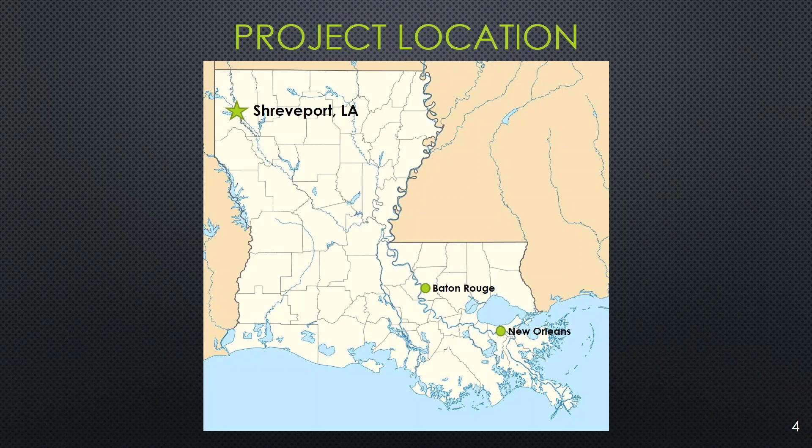Speaking of Interstate 49, this project is part of a greater overall effort to connect Lafayette, Louisiana to Kansas City, Missouri, where it will tie into the southern terminus of Interstate 29, which in turn runs all the way north to Canada. DOTD has referred to the portion of I-49, shown as the star on the map, as I-49 North. That corridor runs from Shreveport to the Arkansas state line and was subdivided into 11 design and construction projects. Altogether, the 11 projects built over 36 miles of new interstate and cost approximately $570 million. The project we are discussing today was the southernmost and was the final component of I-49 North, Segment K.

Incidentally, there's also an ongoing effort by DOTD to upgrade the existing US 90 to interstate standards. When completed, this would extend I-49 south from Lafayette to New Orleans.

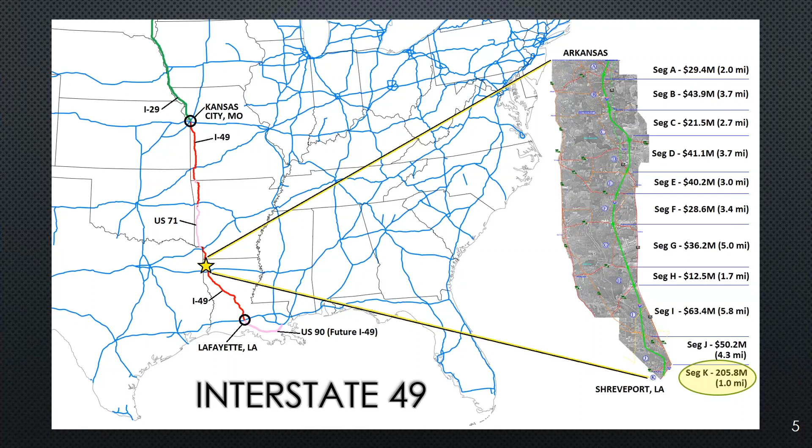This is an aerial and layout of what was proposed Segment K. North is to the right. I-220 runs from the top left to the bottom right of the screen, and I-49 begins with an I-220 interchange in the middle of the picture and then runs north. You'll note the interesting geometry for the interchange.

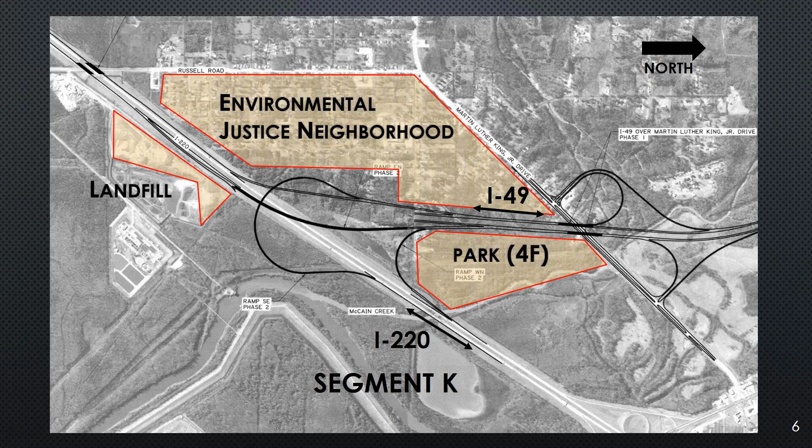This project had a number of challenging site constraints, including an active landfill to the south, an environmental justice neighborhood to the west, and a 4F property to the east.

Due to time and funding demands, the project was split into 2 phases during final plan development. The interchange with Martin Luther King Jr. Drive was separated out and let in phase 1, and the interchange itself, along with some I-220 improvements, was let in phase 2, which is the project we'll be discussing today.

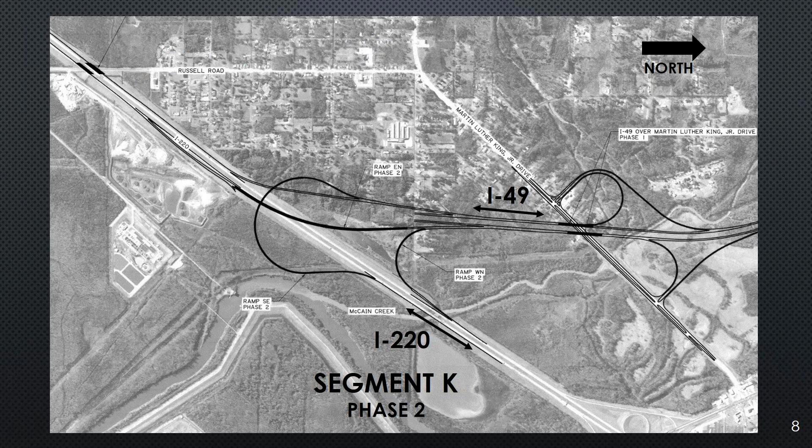Phase 2 consisted of widening of 2 existing parallel steel plate girder bridges over Russell Road, which we won't be covering, and constructing 3 flyover ramps serving as direct connectors between I-220 and I-49, which are the subject of today's webinar.

Ramp EN, or east to north, which is a 2-lane ramp over 3,000 feet in length, has a width that varies from 64 to 40 feet, which was due to a gore area at the beginning of the structure, and has a radius of 3,500 feet.

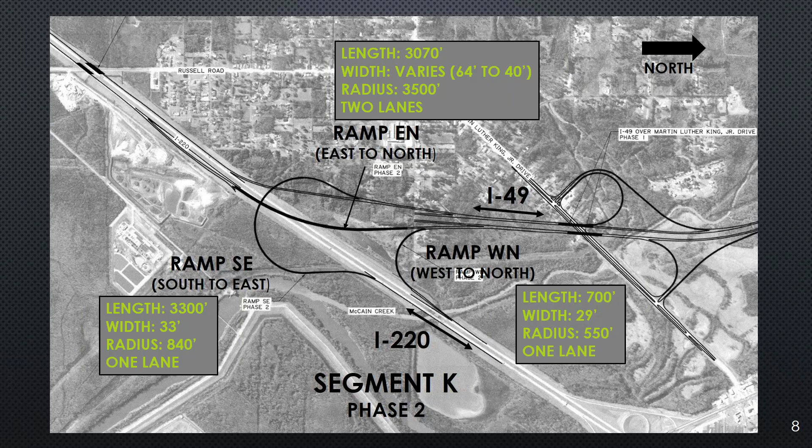Ramp SE, or south to east, which is a 1-lane ramp that is 3,300 feet long and has a width of 33 feet and a radius of 840 feet. And ramp WN, or west to north, which is a 1-lane ramp that is 700 feet long, has a width of 29 feet and a radius of 550 feet.

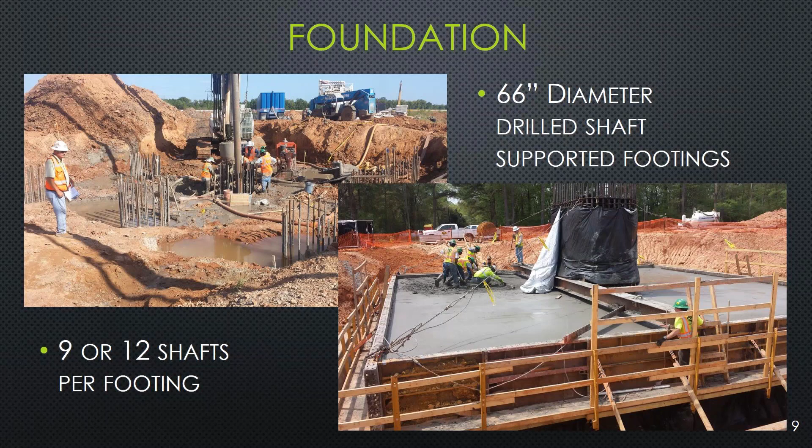All 3 ramps are founded on drilled shaft supported footings. Typically, footings at intermediate bents had either 9 or 12 66-inch diameter drilled shafts that were, on average, approximately 60 feet in length.

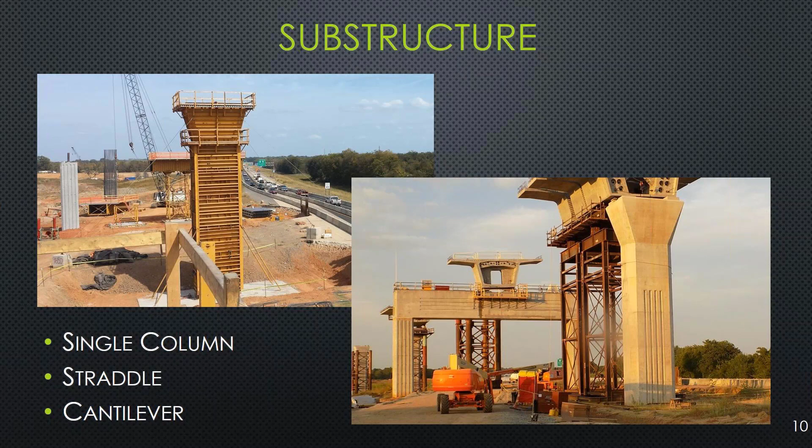The majority of the substructure consisted of single column bents with flared caps, but due to the severity of the skew crossing of ramp EN over I-220, 2 straddle bents and 1 cantilever bent became necessary. The straddle bents were post-tensioned, but the cantilever bent was conventionally reinforced.

We were required to maintain 1 lane of traffic in each direction for the duration of the project. The original suggested sequence of construction proposed closing the median lane on each side of the interstate to facilitate the median construction work, and closing the outside lane on each side to facilitate the outside work near the shoulders.

However, during construction, the DOTD project construction team, in conjunction with the contractor, devised the scheme shown, which was to cross over traffic and completely close one side of the interstate at a time. This change greatly simplified the construction and increased safety by moving the traveling public farther from the construction work.

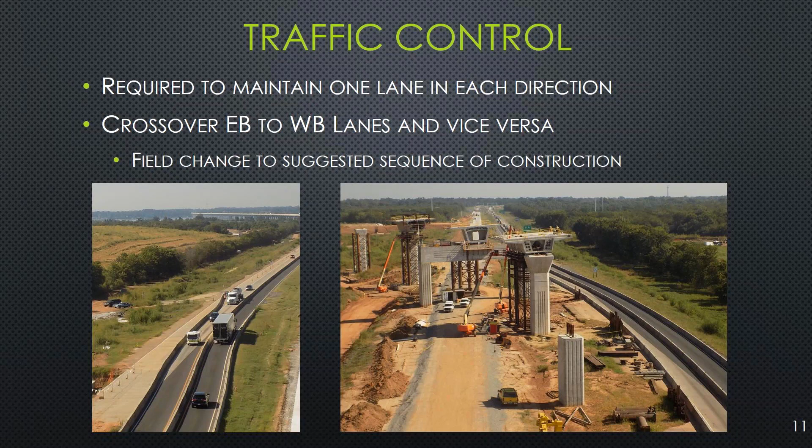You'll note in the picture on the right that the temporary support tower for the superstructure near the straddle bent is positioned in the middle of what would have been westbound I-220.

This was a design bid build project. The DOTD administration at the time decided to include bid alternatives, but because precast segmental concrete was a new technology to the state, the belief was that providing a more conventional design alternative in the form of steel trapezoidal box girders would provide a baseline alternative, mitigate our risk, increase the number of bidders for the project, and ultimately ensure that we achieve the best possible value for the project.

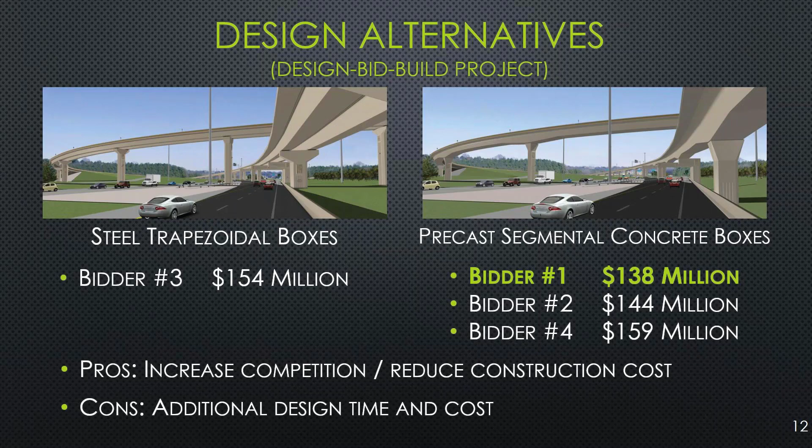There was obviously additional cost associated with the alternative, but unfortunately for our design consultant, given the funding constraints, there wasn't much additional time provided. However, ultimately our designers met the required letting schedule and we received 4 bids on the project.

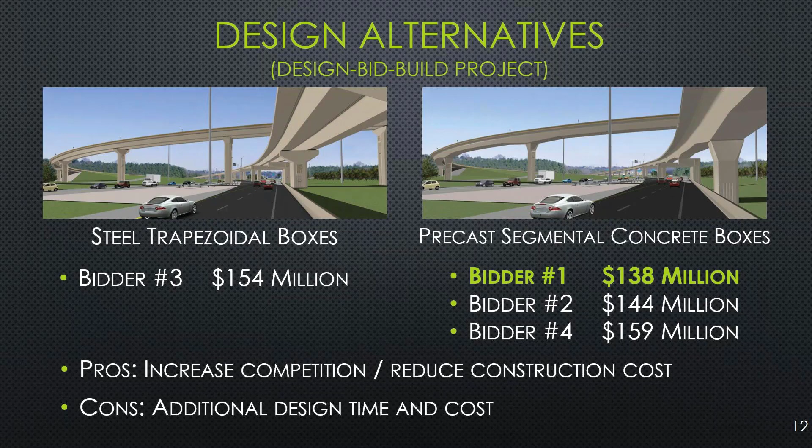3 bids, including the low bid, were received for the precast segmental alternative, and 1 bid was received on the steel trapezoidal box alternative.

And I actually just found out this past Monday that this project also won the 2019 ASBI Award of Excellence, which will be presented at the 2019 ASBI Convention this November in Orlando, Florida.

Like with any project, this project was challenging during design development and construction, but it's nice to see not only the final product functioning as was intended, but also for everyone to be recognized formally for all of their collective efforts. So with that being said, at this time, I'd like to turn the presentation over to Craig to discuss the more technical aspects of the project.

Thank you, Paul. Here's the agenda of what the major topics that I'm going to discuss with you today, and in some detail on it.

Before I begin the presentation, I'd really like to stress a key point and something I think is very important to understand with these style of bridges. The segmental bridges are a construction technique that has design implications, and as we walk through these slides, I think it'll be apparent why I believe strongly in this.

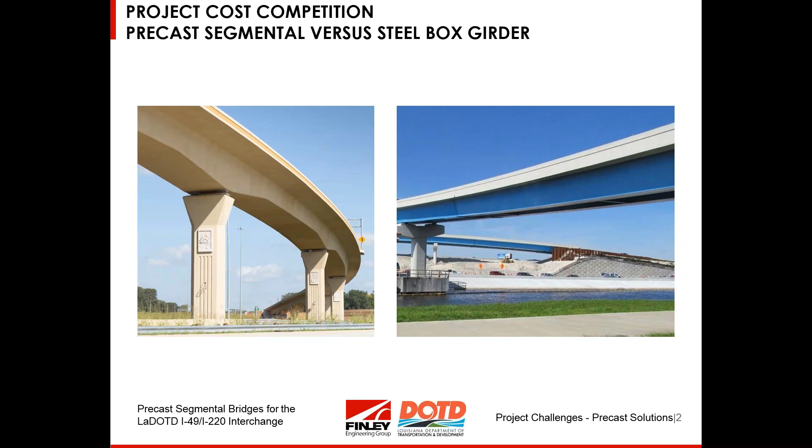As Paul shared with you, probably the biggest challenge on this project at the beginning is the desire by LaDOTD to introduce precast segmental bridge construction into their project type. So with that said, this job from day one was a cost competitive option presented for the contractors, and that drove a lot of our thinking and a lot of the challenges to really develop a fine-tuned project that had the design incorporating details that we knew was important for a successful project. And again, like most projects that have an ABC component to them, price is always a decider.

The LaDOTD had worked a lot with local stakeholders, and there was a demand for some project aesthetics. But again, in a cost competitive environment, these needed to be low cost or no cost.

Some of the things that were developed and added to the project were the column cap details, which serve a multitude of purposes we'll talk about later in both construction and future maintenance. But it also does a good job of visually transitioning between a constant cross-section column into a variable depth superstructure.

The local stakeholders wanted something unique about this project that addressed their social and cultural significance in the area, and there was a precast medallion developed in conjunction with that, which spotlights some of the influences. The consistent visual of the haunch segments of varying span lengths was very important, and when you look at this picture, it's obvious to see that the linear haunch on the first five segments was a critical design aspect on the project.

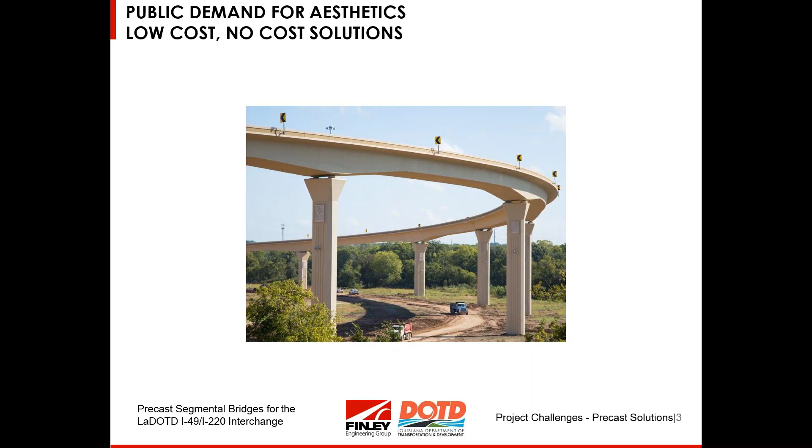Columns were constant shape, but we incorporated rustications and bevels into them to give a little more interesting look. In the end, I think the job has very good aesthetics, and they're basically things that are no cost, but were incorporated in to meet the project challenges at the beginning.

With this project, one of the biggest challenges, Paul shared some of the details, but probably the biggest challenge is this project has 730 segments on it. But with that, in those 730 segments, we had to adapt to span lengths of 140 to 260 feet.

The depths of segments ranged from 9 to 13 feet. We had a lot of variation in the height of the columns. But probably one of the two biggest challenges on this project were how to handle the varying roadway widths, which are very significant, you can see there, but also the various curvatures.

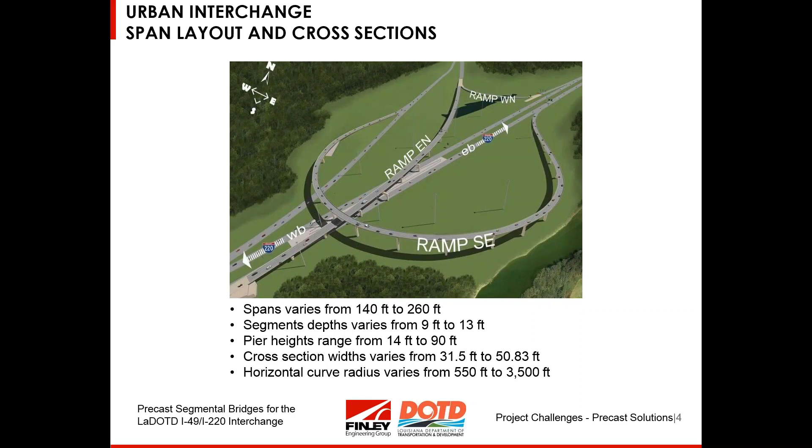These challenges are perfectly suited for ABC construction principles, and really drive the means and methods on this project that made it successful.

The big challenge is, how do we cast 730 segments with the minimum number of casting machines? A casting machine typically costs approximately $500,000, and they're good for 500 to 600 segments before refurbishing.

With the large number of segments and a lot of variation, both in depth and width and cross fall in the segments, we had to come up with a shape in the design process that allowed consistency and could be adaptable with constant forms and different insert panels.

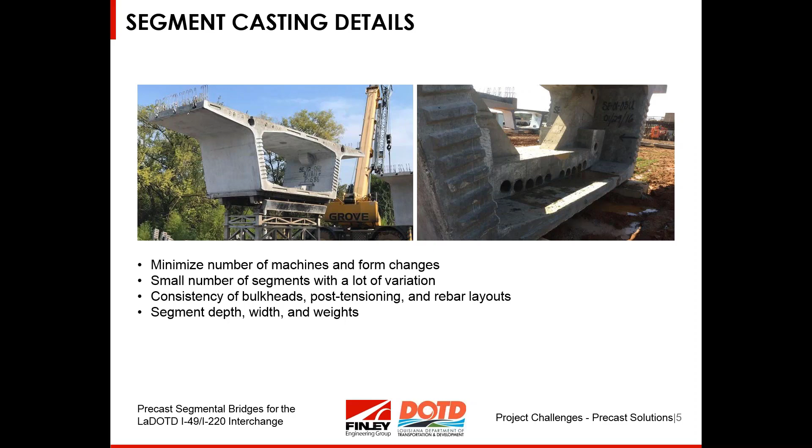You can see on the left a typical segment there in the casting machines that have the stack to adjust for the vertical dimensions of the segment. And on the right, it's again a typical segment, but form panels were introduced into the core forms for a deviation segment. A critical element always in a project is segment geometry, and these casting machines, one machine could accommodate all the variances.

In a project, it's always a major cost component of where you're going to cast the segments. It was no different than I-49, I-220. There was some adjacent property within the right-of-way that was available, very close to the interchange where the casting yard was set up. Other locations had been investigated, but this provides the most efficient use of labor and management.

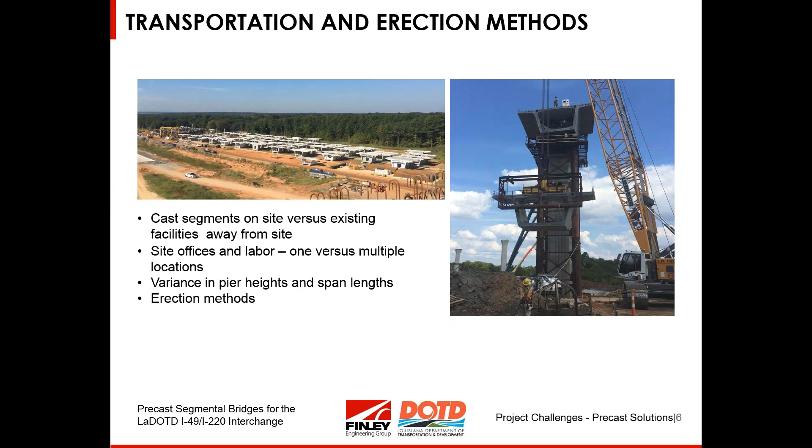Also reduces transportation costs. The variance in the pier heights and span lengths had to be accommodated in a uniform fashion and with a consistent set of equipment and forms to make it feasible. Overall, the erection methods drove our thinking in the preparation of the design. Faster and more for less were key components of making this a successful project.

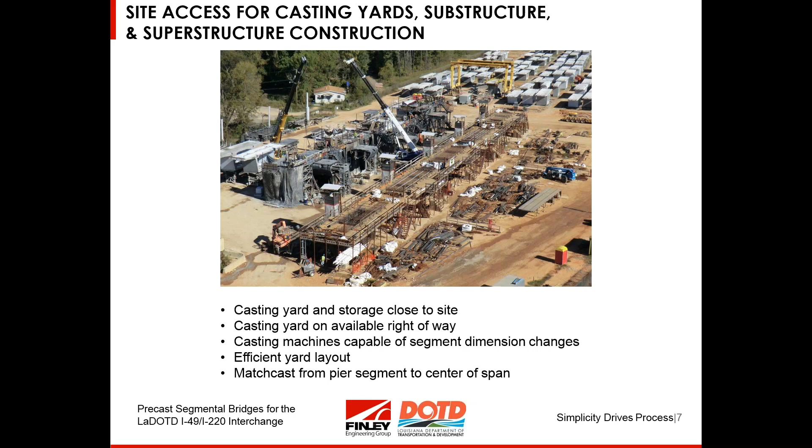The casting yard was about a half a mile from the site, and the storage was adjacent to the casting yard. This was a very efficient layout and very typical of what you would see in a precast match cast operation. Casting started at the pier segments and went out to the cantilevers, as you would expect for balanced cantilever construction.

On the columns, we've talked a little about the aesthetics, but what we wanted to do is simplify the forming. We had cross-section details with a consistent column shape, even though within the column the reinforcing patterns varied, but the shape and caps were the same. The variable pier heights were accommodated by the contractor's forming system and the number of pours per column. Everything was mildly reinforced, providing a simple and conventional construction process.

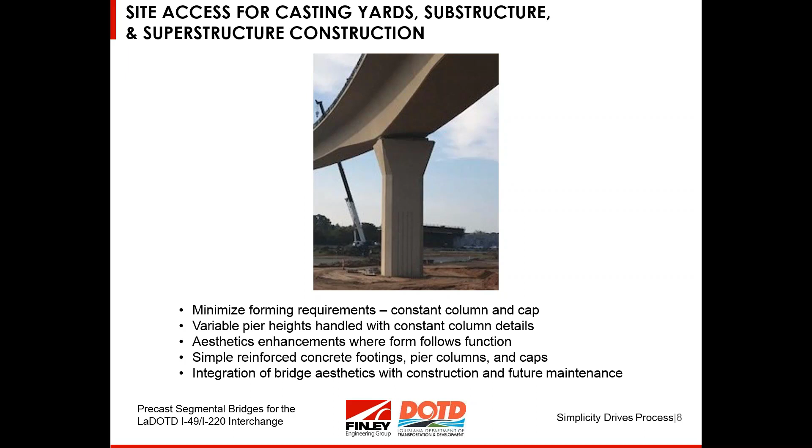For the use of these details, competitive first pricing was a premier consideration, but also future maintenance—how bearings could be replaced, drainage—and the aesthetics had to be low cost, no cost.

In the substructure, we used 66-inch drilled shafts with some fairly high loads. This gave compact footings, but the real advantage was that the project was designed to allow the temporary shoring towers, used to stabilize the cantilevers during construction, to rest over the drilled shafts and within the footings. This minimized the amount of secondary or additional foundations and simplified, streamlined construction.

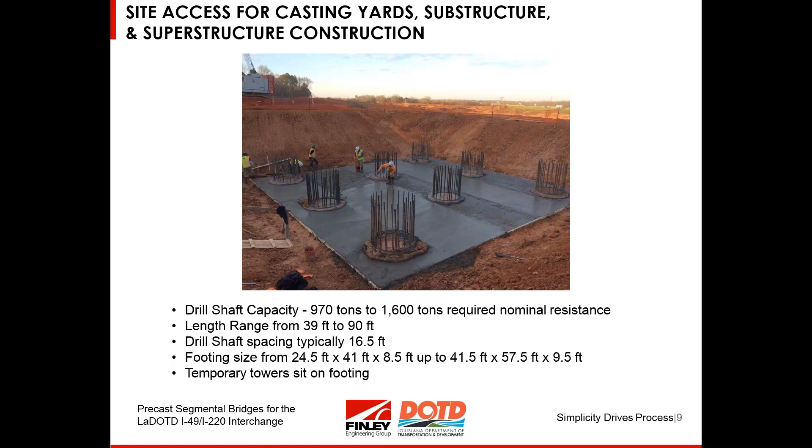Even though this isn't something that speeds construction directly, it's a very important detail to understand—how you match your construction methods with the design.

For superstructure construction, modular stability towers were used. These were approximately 12-foot sections that could be stacked between the shorter columns of approximately 14 feet up to the 90-foot height. At the base of the column on the footing were shim stacks that allowed variation, and at the top of the column there were small pieces that could be added in jack heights to accommodate the height.

Access on the site was really good. Ground-based cranes were used, and the access towers allowed the cranes to get in close to lift the segments, which minimized the craneage and the cost for what these were—lifting about a 90-ton segment.

Balanced cantilever construction—one of the biggest pros of this erection method is it's not linear. You could work on multiple locations. The design impact comes on the closure, but it allows the project to be accelerated versus a span-by-span style that's very linear. Segments were pre-positioned for crane erection, which allowed erection of the deck to go as quickly as possible during the work days.

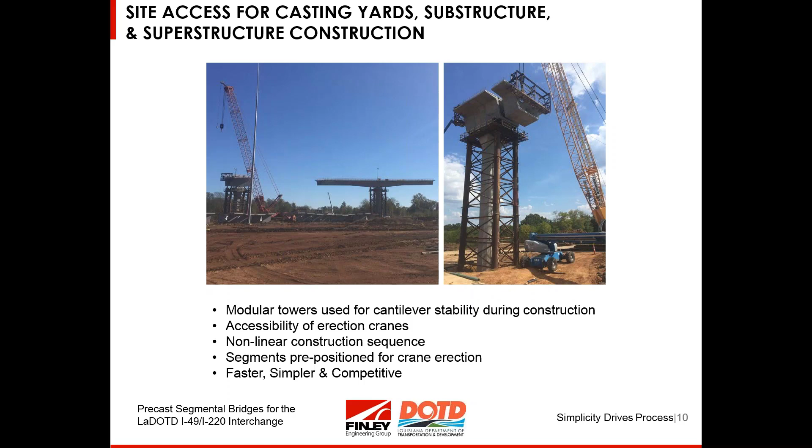Overall, this sequence developed in the design documents provided a faster, simpler, and very competitive erection method without high or unusual equipment demands.

This is probably the biggest challenge at the beginning of the project. You can see the various ramps and what the roadway widths are, and what is happening with the structure depths. When we set up the cross sections, we wanted to take as much variation out of the segments in the wings by adding temporary bulkheads to the casting cells that could be shortened up on the transverse width of the segment.

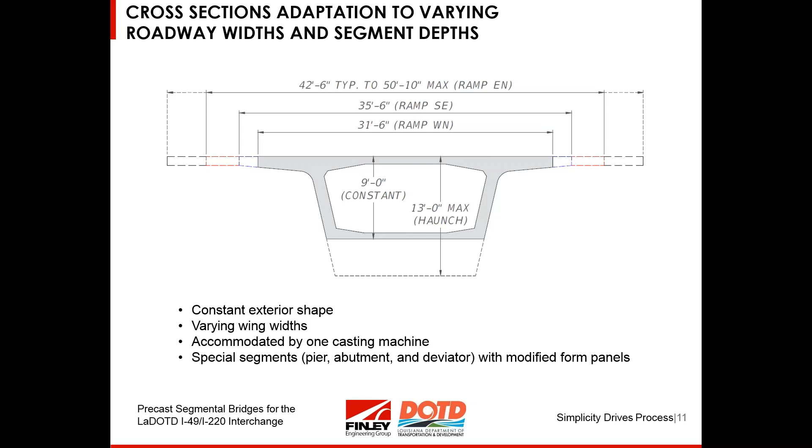This carried through to WN, where the temporary bulkheads had to come into the thickened side of the segments. It worked very well, gave us a tremendous amount of flexibility, and was an easy detail to develop. The casting machines could accommodate all of these changes in the machine design, even though they had multiple casting machines.

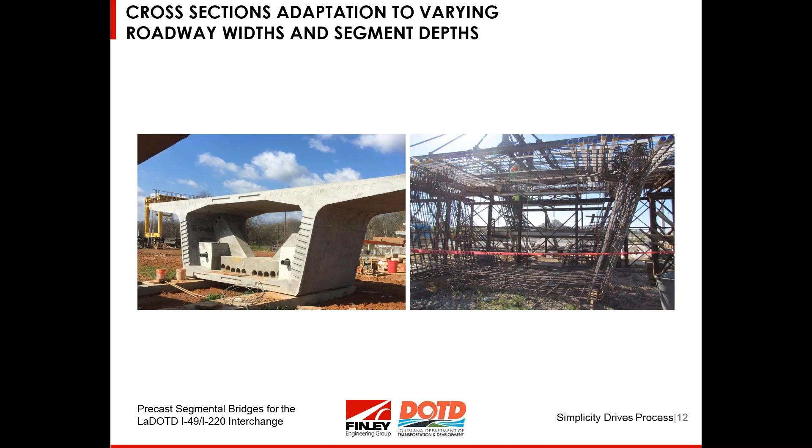Here you can see on the left a good example of how the form panels were used on a typical segment to get the interior shapes that may differ for, say, a pier segment, an abutment segment, or a deviation segment—done inside the segment and inside the core forms. On the right, you can see a fairly simple rebar cage coming out of the jigs, where we adjusted for depth in the webs, the height of the bars, and transversely when the segments narrowed, adjusted the length of the wing bars.

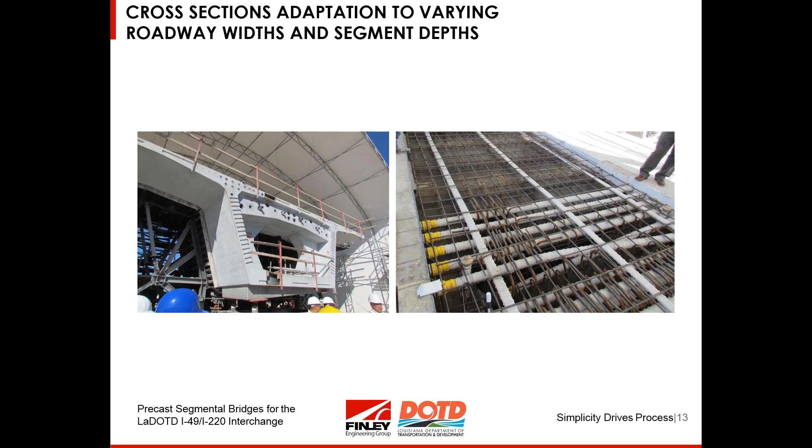On the right is a very good example of a simplified longitudinal PT layout and transverse PT in the segment details. The bulkheads on these projects were very important to allow the transitioning of the tendons as they move across the slab, but also this project uses a lot of external PT with the diabolos, and there are varying heights and angles that have to be accommodated. Overall, the details are fairly simple and extremely flexible to adapt to varying conditions on the project site.

Here's an example of the cantilever tendon, top slab tendons in a cantilever. It's a good example of how the tendons are deviated into the ducts that are in the top slab. On this project, the cantilever tendons are all internal to it.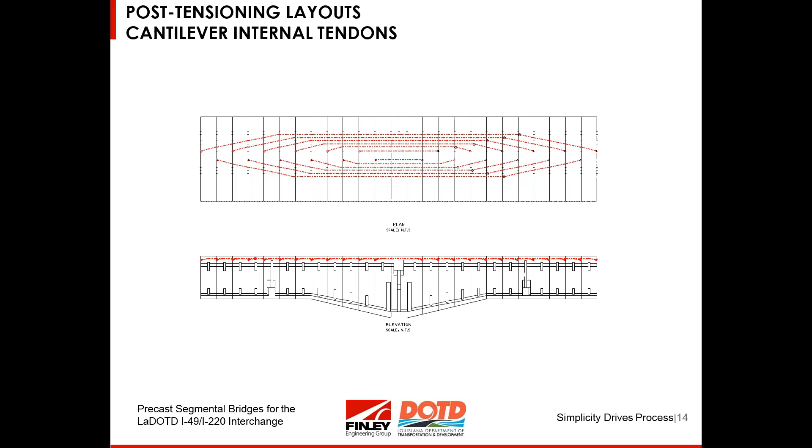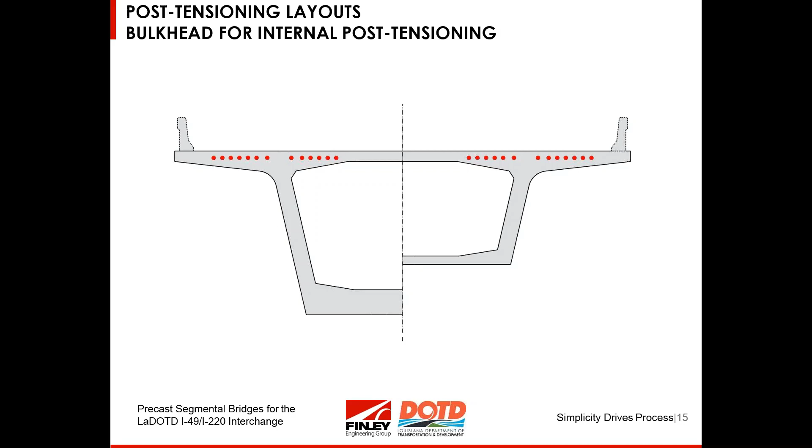The blocks you see under the red longitudinal tendons in the elevation were where the temporary PT bars were anchored for segment erection. There was one longitudinal post-tensioning anchor per web per segment, and where you can see the red circles, this is where the ducts move - they anchor at the web top slab intersection, and as they progressed out, the tendons would move out into the holes and then come back in.

Here's what the positive moment continuity PT layouts look like. These are all external tendons. They're grouted, but the only bond on the tendon comes in the pier segments with it. So these are totally external.

You can see that these tendons deviate both horizontally and vertically through the course of this. This is a simple illustration, but if the horizontal geometry was shown, there would be horizontal deviations due to the deck geometry too. One advantage of this type of positive moment continuity is the inclined tendons that reduce the shear requirements in the segments, which also reduces the thickness of the webs.

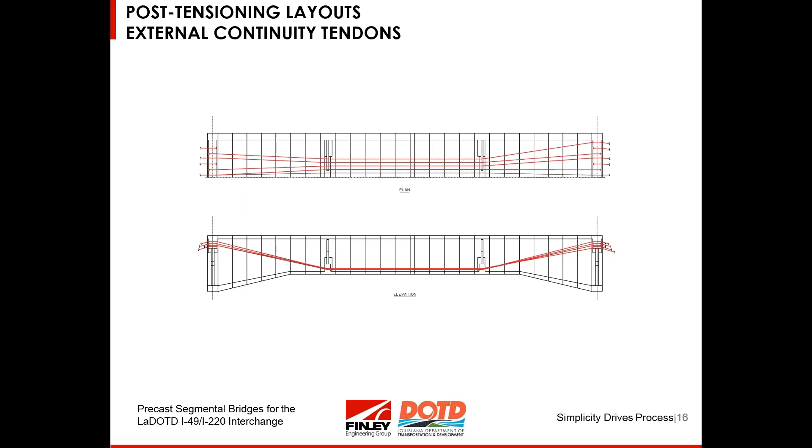With the tendons being external, it reduces the dimensions required in the bottom soffits for tendons to be uniform. This style of PT typically shows about a 10% reduction over conventional internal PT, but it also lightens the segments and is much easier to inspect and maintain in the future. Our experience is this is a significant time saver and a very good cost savings approach.

Here's where they look. The red dots show where they deviate. The darker rectangles are shown for anchors. The tendons are anchored in the pier segments, and based on the tendon layout, some can be anchored in the deviation saddles or the deviators, which gives us some overlap - a little more efficient and flexible in how the PT is installed.

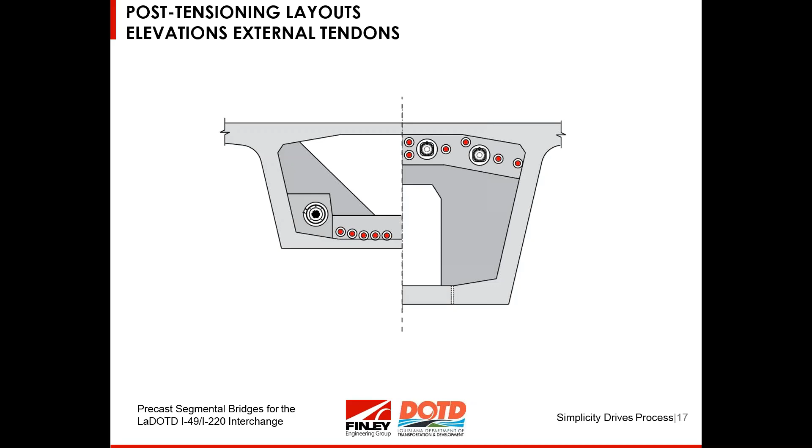As I discussed on the previous slide, the eccentricity of the tendons is a little higher due to them being outside of the bottom slab, but the bottom slab is narrower.

Here's what it looks like during construction. You can see the grout on the photo on the right. The tubes coming out are the grout tubes. The grout caps are on the tendons, and they're ready for grouting. The ducts are HDPE pipe - there's no Schedule 40 pipe in any of the deviations, the deviators, abutment segments, or pier segments. The duct runs continuous through the deviation points.

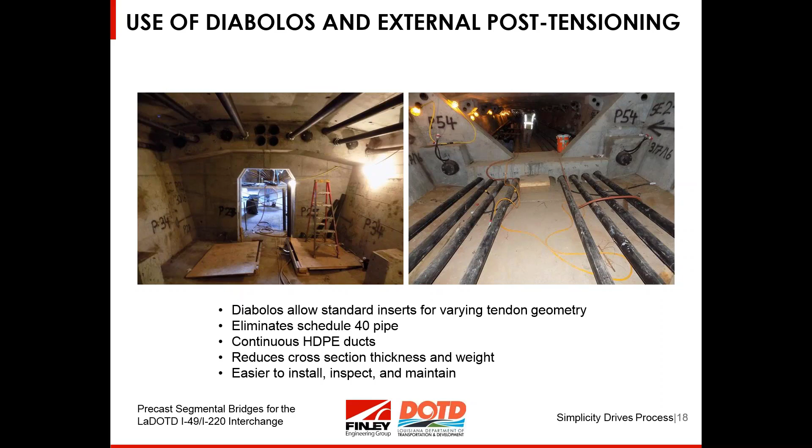So this is a good example of the differences, say, over conventional internal tendons. This project is conventionally grouted. Some of our current projects now feature the continuity PT that has wax in it - unbonded, but with a wax versus grouted, which is showing a lot of promise for easier, faster installation, but also some advantages for long-term maintenance.

Everybody who hasn't used Diabolos always asks, how do you do it? It's really a very simple approach. You can see the white spun nylon - there are two pieces to it. It has a threaded rod through it that attaches to the form panels to hold them into position. And with Diabolos, one size fits all.

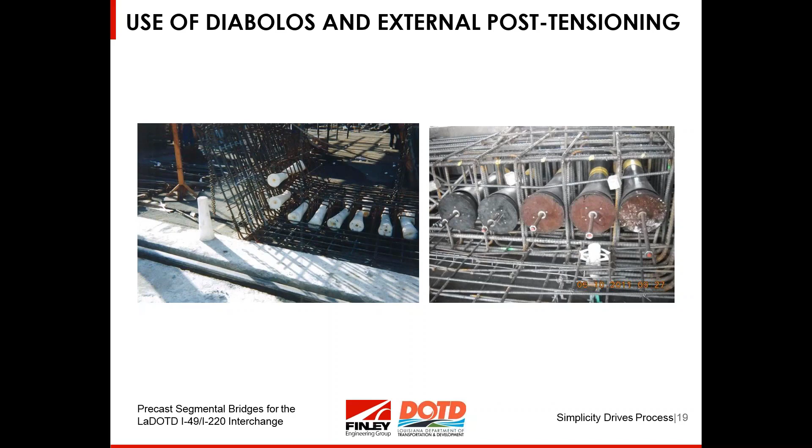The bell shape at the end of the Diabolos is sized to fit the vertical and horizontal deviations of the tendons, ensuring you never have a tendon bearing on the edge of the deviation or the Diabolo. These easily fit in the rebar cages, and the taper on the Diabolos makes it easy to pull them for the draft and leaves the formed area.

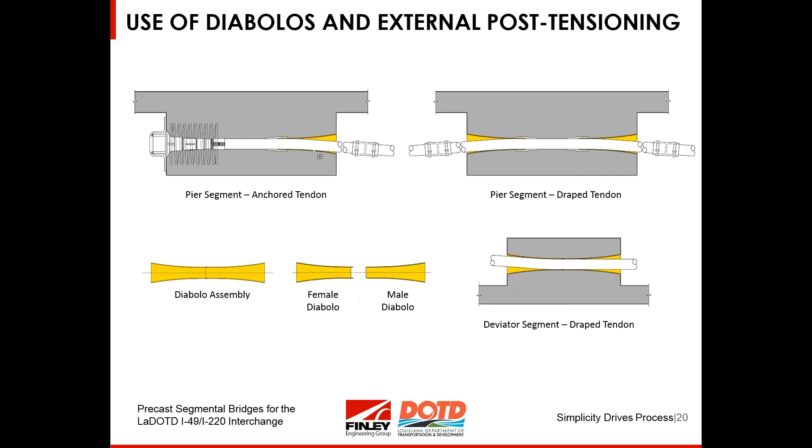Here is an illustration that shows a little more of the detail. The yellow portions are what the Diabolo looks like. You can see the one-size-fits-all design handles the angle deviation both vertically and horizontally. As they move through, the ducts are continuous through the deviation to the anchorage. This makes it a lot easier for installation, since the couplers can vary anywhere along the length based on how a contractor wants to handle the duct materials.

Here you can see the basic premise of how a Diabolo works compared to Schedule 40 pipe and a deviation saddle. On the left, the basic design requirement is that the tendon and ducts bear on the curved portion of the Diabolo. With a deviation saddle and pipe, you account for the strand bearing on the pipe, which then bears on the concrete.

Diabolos, when we first brought them to the U.S., we did some testing over 1 million cycles. The owner was concerned about the potential of strand burn or duct burn during installation or the post-tensioning operation. With over 1 million cycles, there was no issue of duct burn.

It's very successful. One of the issues with Schedule 40 pipe is it requires very high tolerances of placement, both vertically and horizontally in the casting machines, typically down to a quarter of a degree. I've been doing this almost 40 years, and if I ever have a project where the deviation pipe is perfectly placed in a deviation block, it's probably a classic example of better lucky than good. So the Diabolos take that tolerance issue out of the equation.

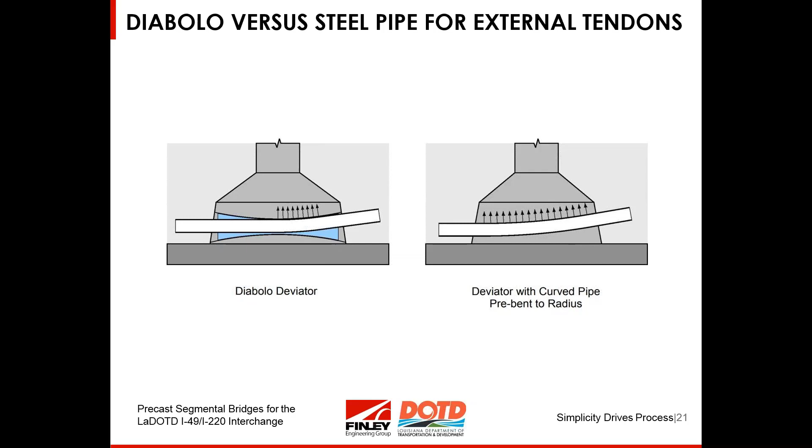Also, a Diabolo style system has less losses due to friction in the deviation pipes, and there's virtually no strand breakage. With a Diabolo, pulling a longitudinal tendon typically has less tendency to trap the wires on the surface bearing against the pipe, which causes wire breakage.

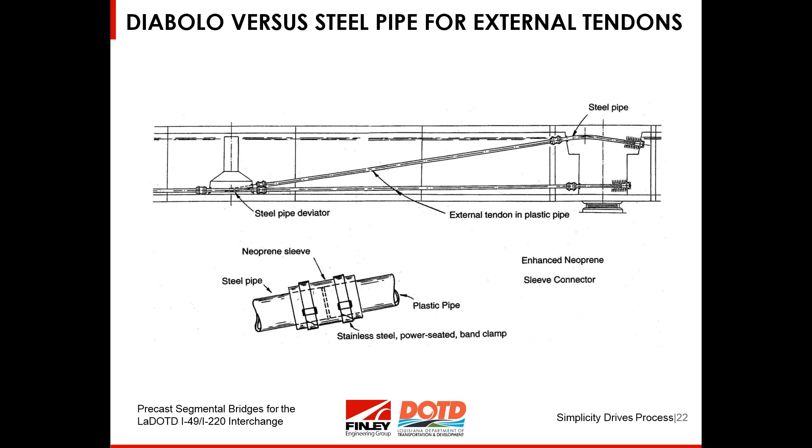Here you can see in the layouts what it typically looks like. It's a difficult coupling between the steel pipe and the plastic PE pipe, as far as what the straps look like and the neoprene sleeve that goes over it. You can see it's very similar between the two, except it's plastic on plastic versus pipe.

Let's take a minute and talk about the number of segments on the project and how they're configured, just to get a better understanding of the importance of having a common segment shape, and how you handle the changes in some of the dimensional parts in the core of the segment.

The pier segment again uses the standard shape, but has diaphragm panels to handle the diaphragm of the pier segment and the Diabolos. Very similar on a deviator segment and an abutment segment. The variable depth bottom soffit of the forms moves up the webs, so it's narrower at the pier and wider as you move out, which is an easy detail to handle.

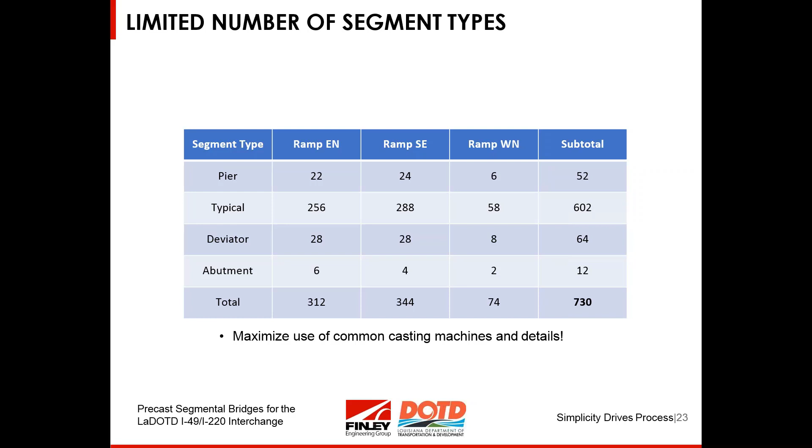This is done with frames that sit into the bottom soffit tables. The key point and takeaway is maximum consistency of common details for the maximum number of segments, trying to minimize the number of oddballs. You can see from these figures, 602 out of the 730 segments are virtually the same style, same details.

Balance cantilever construction: the contractor, PCL, had recently finished up a similar project and had available all the temporary towers. That was really an advantage, I think, and can be seen in the difference in the pricing.

The same support system was used between the tall and short piers by having modular components that could be stacked. If you see on top under the blue tarps, these are the jacks that will put the geometry into the segments for erection. A key feature of segmental construction is that they erect in the same position they were cast, so there's no additional adjustment or fix needed at this point.

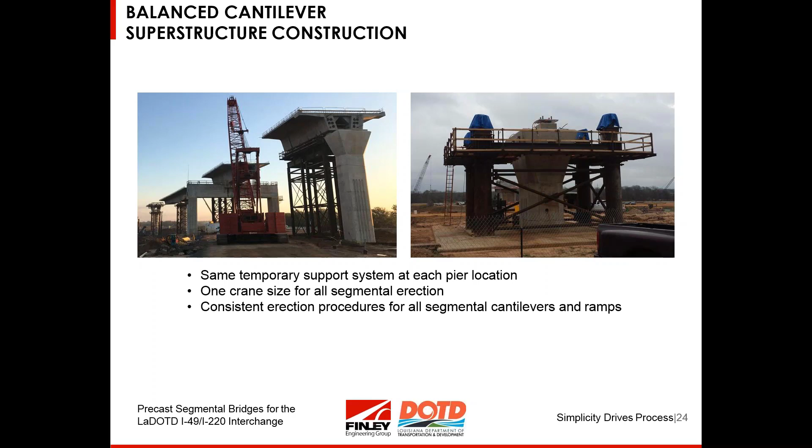For cranes, you can see one size crane was used. Multiple cranes were on the project, but everything was sized to balance the equipment requirements. The same method or style of cantilever erection was used on all ramps, for the entire segmental portion of the project.

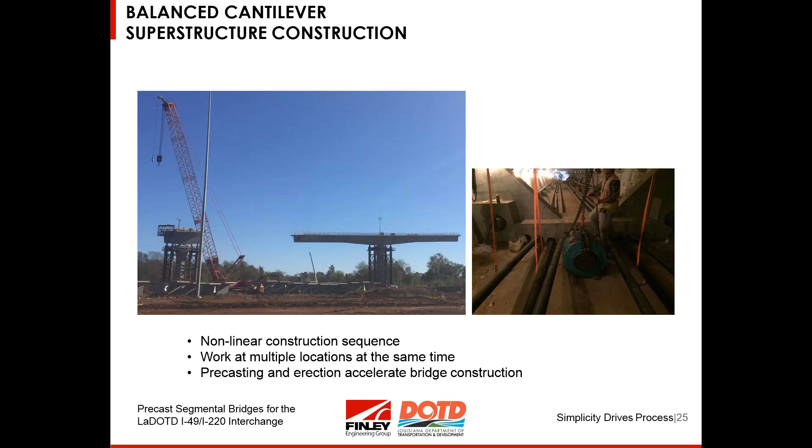Probably the strongest thing I can say from an ABC construction techniques standpoint: balanced cantilever works fantastic and spans 180 to the 275 range. It's simple, doesn't require a lot of temporary construction equipment, and segments are kept in a usable, readily available crane size. The advantages include a nonlinear construction sequence, which allows schedule acceleration with multiple locations worked at the same time, helping prevent a linear process where a problem at one location stops everything until it's resolved. Precasting segments off-site also reduces the amount of time construction is happening on site, giving you good accelerated bridge construction with multiple activities going on at the same time.

Some other details of interest: disc bearings were used, and they were fairly highly loaded. We tried to minimize the number of expansion joints, so these bearings accommodated up to 8 inches of total movement. The bearings were aligned to the center of stiffness of the bridge, so it's not just horizontal. This is important on long distances between expansion joints—the bearings need to follow the line of action.

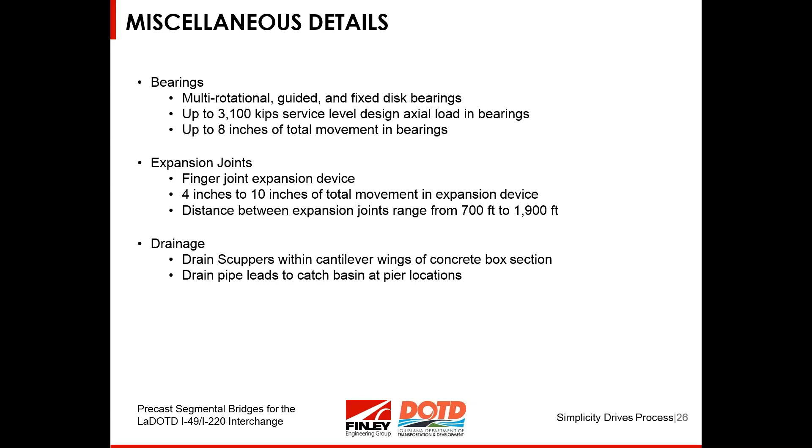We used finger joints up to 10 inches in movement at the expansion device, based on up to 1,900 feet between expansion joints. Finger joints give good performance and are easy to maintain and inspect, which was important to the owner. Drainage was conventional—scuppers on the cantilever wings, piping to the center of the box, and back to the center of the pier where it dropped into a catch basin at the columns.

As with any project, it's always important to ask what lessons were learned. The I-49, I-220 project was fantastic because it gave us a second chance to refine details we developed for the Palmetto Expressway. Similarities included large interchange flyover ramps, variable spans and cross sections. This was the first use of diabolos in the state of Florida, and it had tremendous success, which gave Louisiana LaDOTD confidence that it was the right solution for this project too.

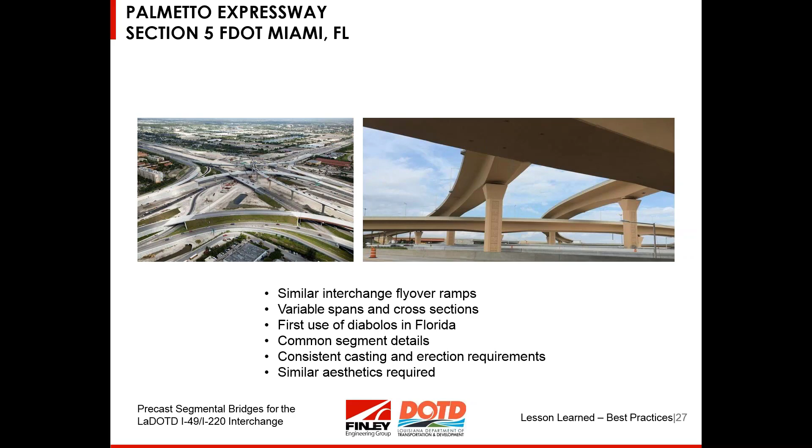For common segment details, we put a little perfection and tune-up on what was done on Palmetto, with similar casting and erection requirements. The big difference on Palmetto was that it was an existing interchange, built with a launching gantry above the decks and over traffic, whereas I-49 and I-220 was a new interchange and we could work from the ground. Similar aesthetic requirements led to similar results, which was really beneficial in the development process. It also gave Louisiana LaDOTD a chance to see what we were talking about before they added the precast segmental alternate to their bid documents.

Another lesson learned: experienced contractors with existing resources—whether people or equipment—are really important on these projects. Using variable depth segments for variable span length, especially getting up into that 265, 270 range, is a really good way to handle it versus adding a lot of segment depth. Diabolos, in my opinion, are the only way to go for deviation, and external post-tensioning has tremendous advantages both in time, cost, and future maintenance flexibility.

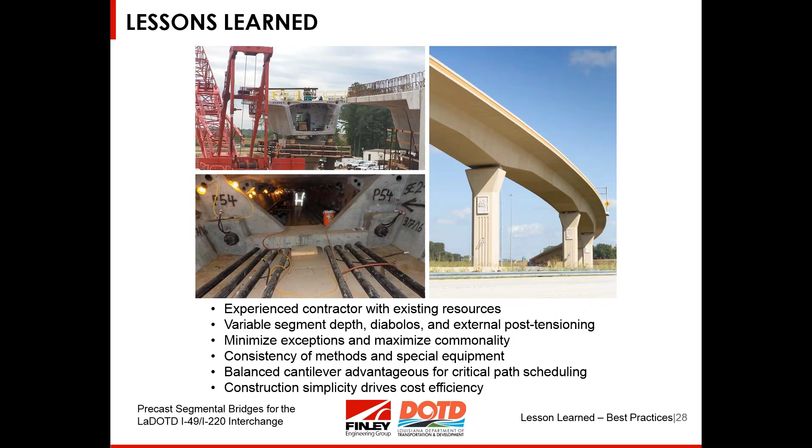As with any ABC or segmental project, minimize the exceptions and maximize the commonality of details and methods. Keep special equipment to a minimum and keep the methods repeatable. I'm a big fan of balanced cantilever because of the advantages—being able to work in multiple locations, and being a non-linear process from both a scheduling and construction point of view. Construction simplicity drives cost efficiency, which is always important to everyone.

So with that, ends our presentation, and I'll turn it over to you, Paul, for the Q&A.